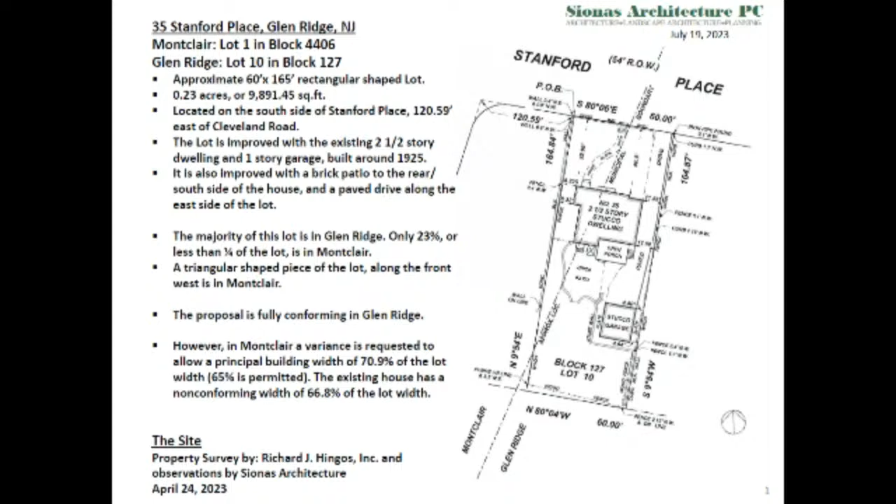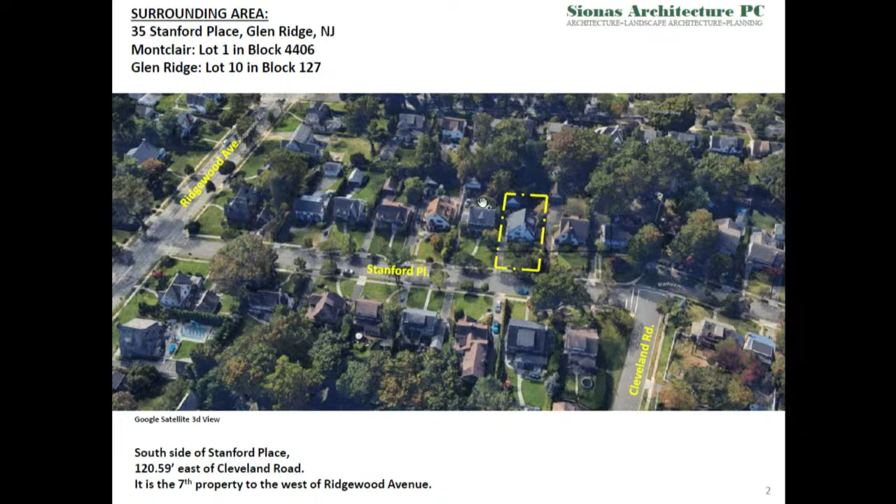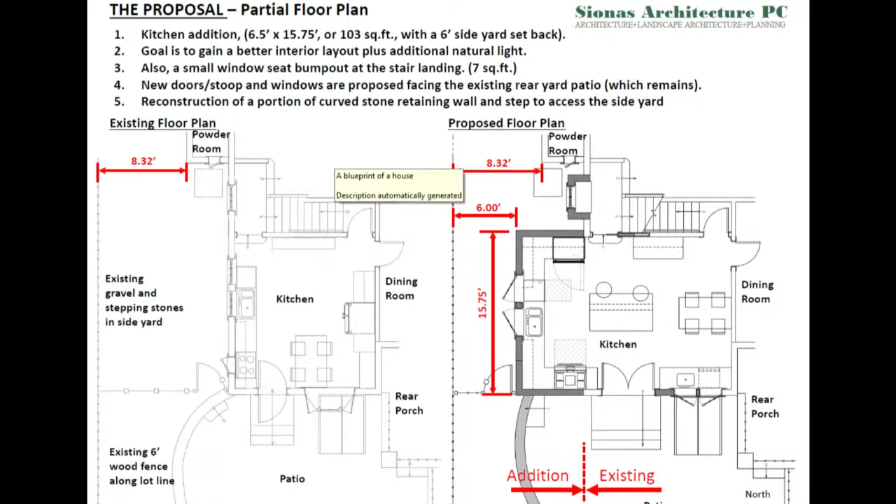There's a curved stone retaining wall that leads from the patio to the existing side yard. That will remain, but be slightly reconstructed to move the gate that leads from the patio to that side yard. That side yard, in the bottom left of the previous image, is currently gravel with stepping stones, so it's a little-used side yard. There's also the existing air conditioning condenser unit there.

The entire yard is surrounded by a 6-foot-high wood stockade fence on this west side, which adjoins the neighbor to the west, and then there's a wood fence separating the patio from this side yard. Next slide is the site plan.

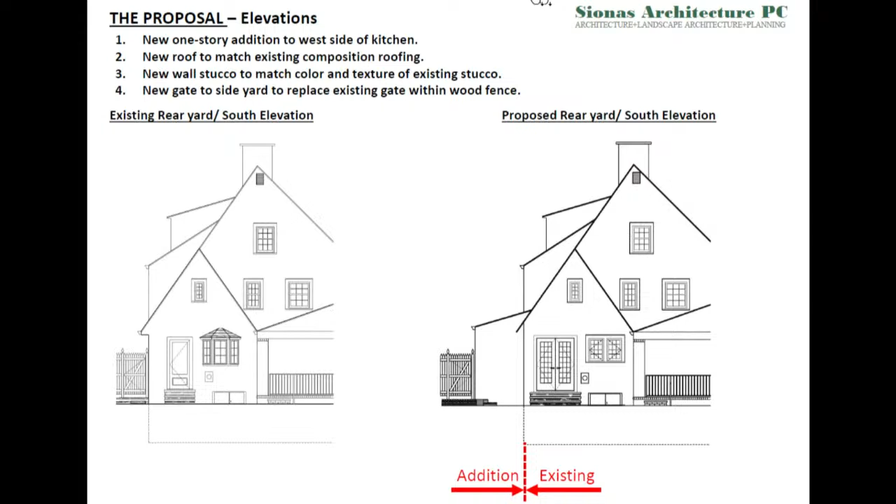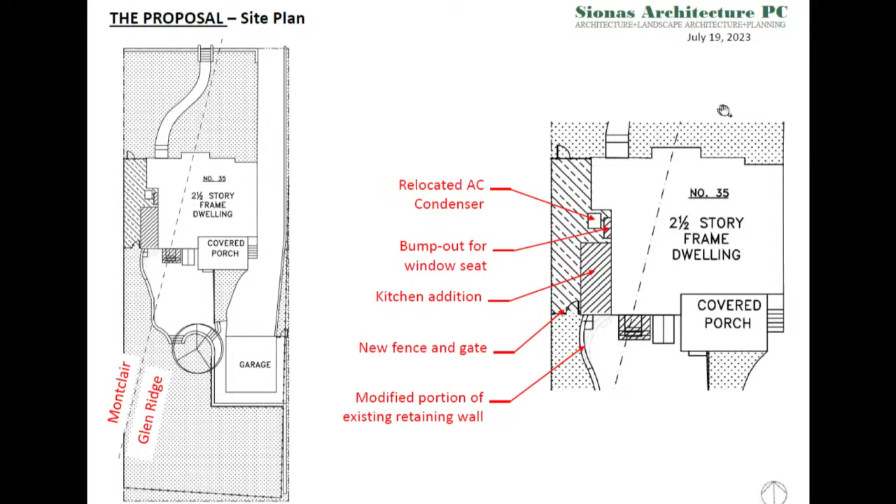Importantly, based on the recent ordinance amendments, it complies with the maximum impervious coverage. The impervious coverage on this lot is allowed to be 55%. The existing is 41.8%, and the proposed is only 43%, so we're well under the allowable impervious coverage.

As I said, the existing house was developed around 1925, as was the garage. It has an existing nonconformity, so the front portion of the house closest to the street encroaches into, or exceeds, that allowable 65% building width.

But once this ordinance was adopted, I think in 2006, to allow for a maximum of 65% of the lot width, and the purpose was to minimize large houses on small lots, this house was built in 1925, and it didn't comply then, and it doesn't comply now with that 65% maximum lot width. But due to the existing topography, as I said, the property slopes up from the street at Stanford Place.

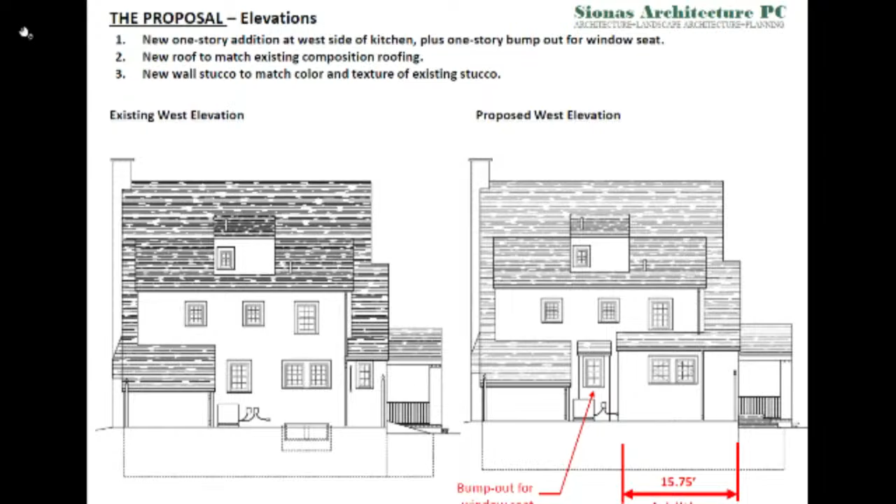And then the condenser is just being essentially slid over a few inches, bumped out, slid to the west in order to create that bump out, as you look at the floor plan, with a window seat at the bottom of the stairway.

The current layout of the kitchen with the 4 windows presents the same view of the house to the west, I think is how you described it. Or is that to the north? This image is from the house to the left, to the west.

So with the bump out, you'll be moving, what was it, 2 or 3 feet further towards that house, is that correct? With that small bump out, the one that's labeled bump out for window seat. Right.

And do you anticipate that there would be any concerns by the neighbor, have there been any concerns about the windows, sort of the view going back and forth between the 2 houses, because you're moving a little closer with the bump out? No. As I stated, there's a 6-foot-high solid wood stockade fence along the common property line. Also, I failed to mention that the neighbor to the west has their driveway directly along the common property line, so we're separated from the neighbor to the west by their driveway.

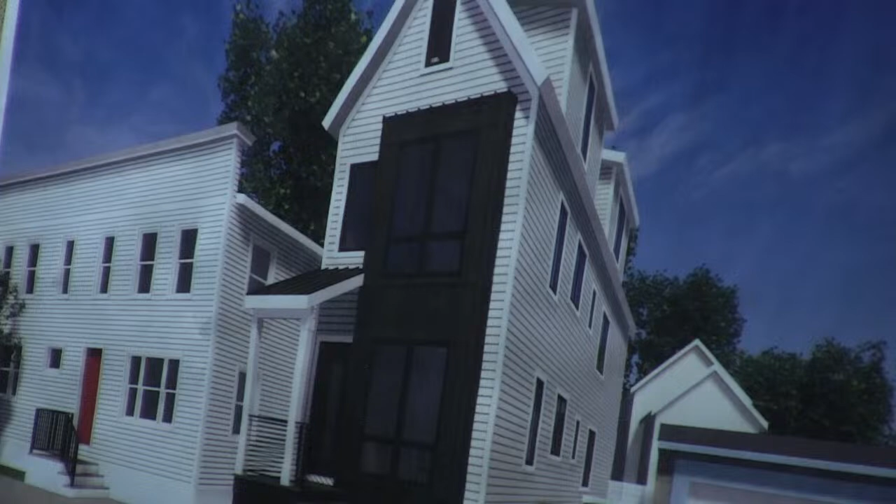So here are the same drawings that you have in front of you as well. Let me position these a little bit better so the board can see it. These are the same drawings that were presented and submitted to everyone at the board. The only difference is that I included the impervious calculations that were included as an exhibit that Tommy had put online as well, so that information that I sent by email that got approved, I just added that little blurb onto these drawings. So here you can see that what we're presenting is similar in flavor to what I've submitted before to the board that has gotten approved.

Just up the street, actually 21 and 23 New Street. Tommy, I'd like to thank you too in your report. Actually, if you look at the last page of Tommy's report, you could see the newest image of 23 and 21 New Street that has gotten built. So thankfully, what we had come up with before and what was drawn was built, it did match the drawings, and it did create kind of a beautiful streetscape, which is what we've been trying to do in and around the area.

So similar in flavor to 21 and 23, we want to present 13 New Street. Again, this is a 2-family house that we're proposing. The layout is going to be that the first floor and basement are one unit, and the second floor and the subsequent attic space will be another unit. This is the same way we had set up both 21 and 23 New Street. So similar to those two, but we have a similar condition here where we have a very narrow lot. It's actually undersized both width-wise, length-wise, square footage-wise. It's a very tight lot, similar to the other two lots, but even tighter.

But yet we're still trying to make concessions in a way to fit a proper two-family house that fits the neighborhood, that improves the streetscape, and also tries to hit the new impervious coverage marks that, during the course of designing this project, had not been enacted, but have since been enacted as law. So although we are asking for that variance, we did actually reduce the impervious coverage percentages with this proposal. So I want to go to page 2.

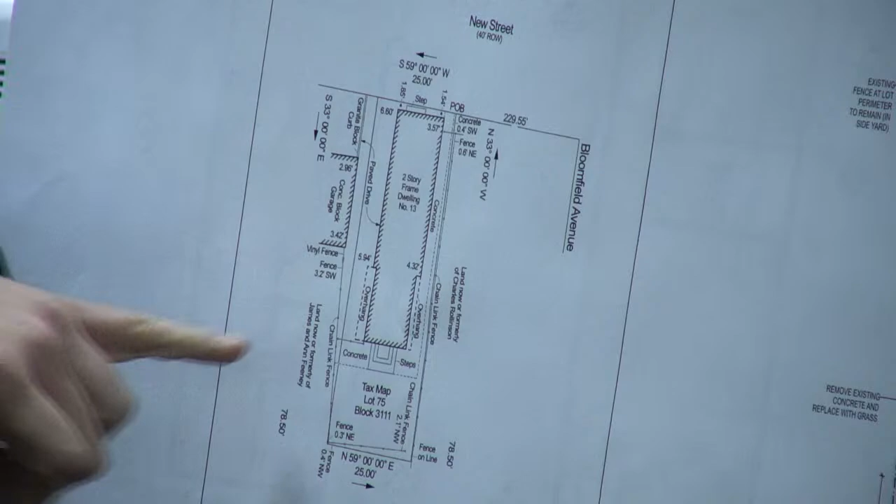So here on the second page, on the left-hand side, you have the existing survey, although it's turned the wrong way - the new street is facing planned north. You can see there's only about 1.5 feet where the existing structure currently sits, and on top of that, they have much more concrete and impervious coverage at the rear of the property and the side narrow sidewalk.

So with our proposal, we are looking to greatly reduce the pavement on that side area, and on top of that, we are removing all of the rear and even more of the parking side impervious coverage. Unfortunately, even with these reductions, we didn't quite hit the 55%, but we got close at 57.6.

So although we are asking for that variance, we actually reduced the percentage of impervious coverage with this proposal compared to existing. On top of that, what we are proposing is that the back foundation walls be straightened up and filled in at the back in order to give us enough depth for the proposed new construction, but without asking for any additional variances with regards to rear setbacks.

On top of that, the biggest implication here is that we are improving the front setback issue. Currently, the front setback is only about 1.5 feet. What we are proposing is that the main articulation at the front, the black articulation you saw in the rendering earlier, is 5 feet from the front property edge, and the main white wall of the proposed design is actually at 6.5 feet. So we are providing an additional front setback to help step this building backwards in line throughout the street.

Unfortunately, our neighbor to our left at 11 New Street is pretty much almost as forward as you can go, and the existing house is at that level. We're trying to push that back to create a better streetscape.

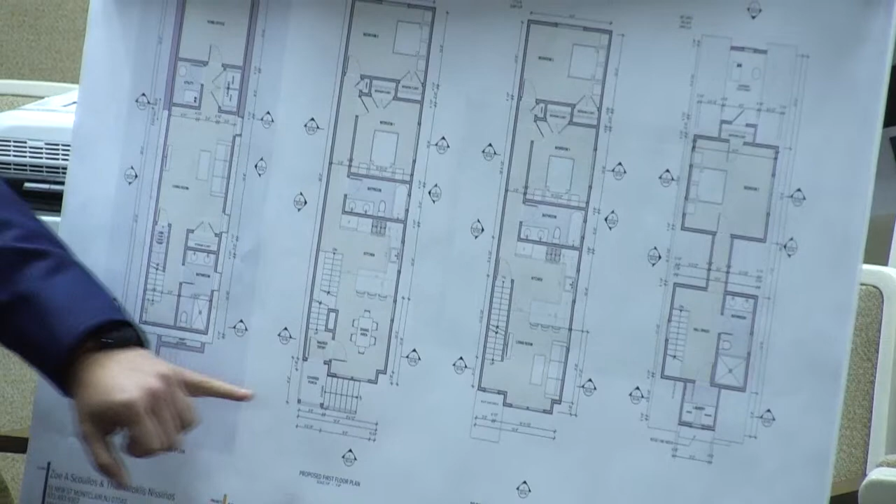Then on the first floor at the front, you have a staircase with a covered front porch that enters into a shared hallway and staircase leading up to the second unit, which is the 3-bedroom unit I mentioned earlier. Similar layout to the second floor - you've got the 2 bedrooms in the back with the living space and kitchen towards New Street.

And then on the attic floor, you have the additional whole master floor, calling it the 3rd bedroom, that has its own separate bathroom and its own separate walk-in closet, so that can be more of that private story. Again, it is upholding the regulation with regards to the size of the dormers - they do not exceed 50%, similar to what we had also proposed at 23 New Street. So again, we're not asking for any variances there either.

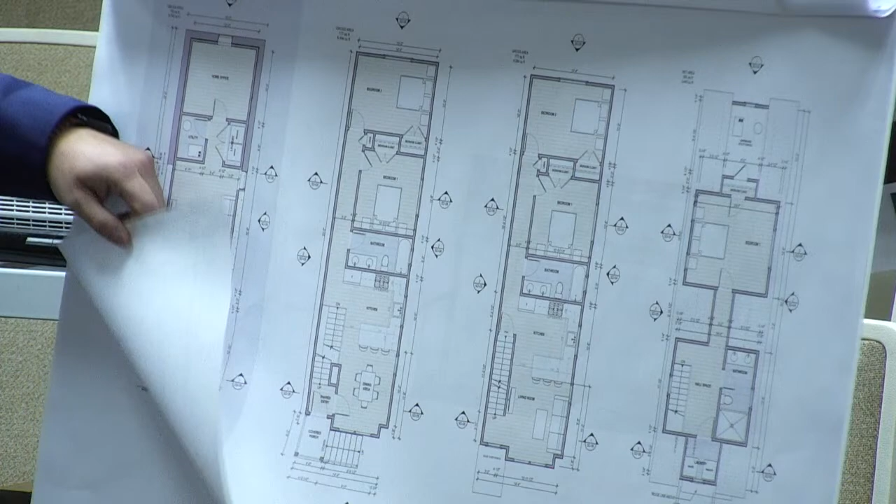And on the next page, the rear elevation and the side elevation facing the narrow side yard. No windows on that side yard, mainly because of the distance from the existing property line. We don't want to propose any windows there because that wall is going to have to be fire rated. The only windows we're proposing are up in the attic space.

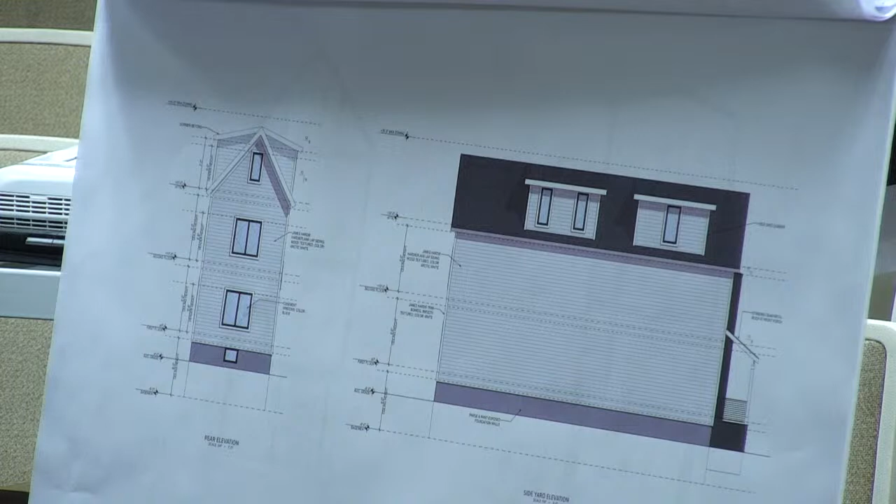So that way we try to utilize all the percentage we're allowed by code in that attic space to bring more natural light up there, as opposed to not so much natural light at the first and second floors. And then lastly, we provided some diagrammatic sections, as in our previous applications, to show we're trying to give generous height with 9-foot ceilings throughout, yet still staying under the 35-foot maximum height value per zoning.

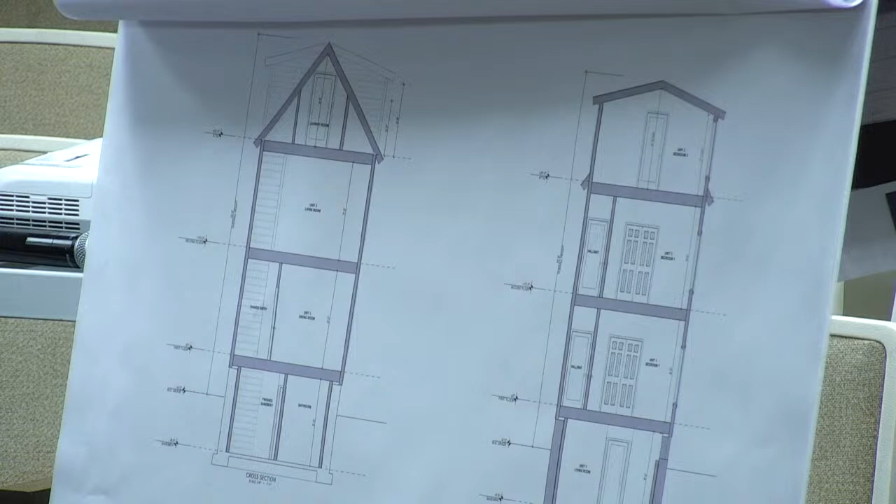Okay. Just a couple of notes here, looking through Mr. Scabiglia's report, just point out where the HVAC units are. Yes.

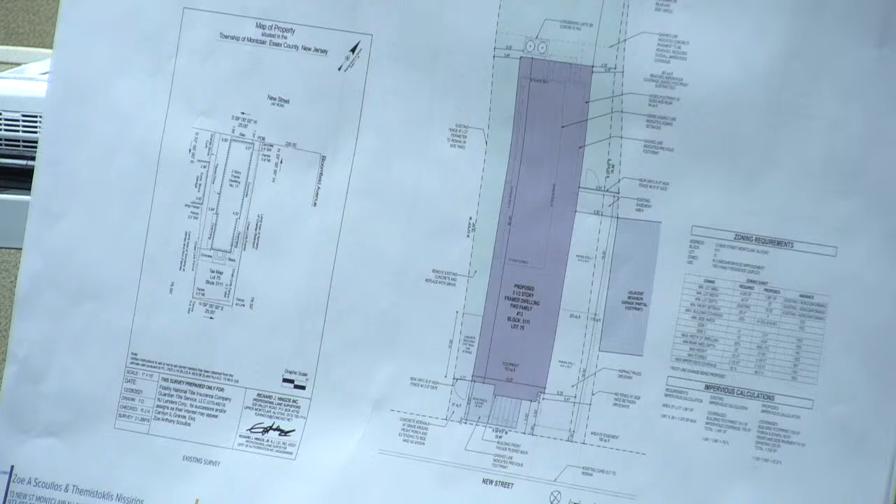Going to the second page, you'll see on the right-hand side the architectural site plan. The 2 HVAC units will be placed at the rear of the property, on a concrete pad that is 6 feet from the property line. We need to maintain that minimum 6 foot per the zoning ordinance. And should the board see fit to approve the application, the applicant is willing to put new sidewalks in front of the home, landscaping, and new fencing. Correct. Thank you, I have no further questions.

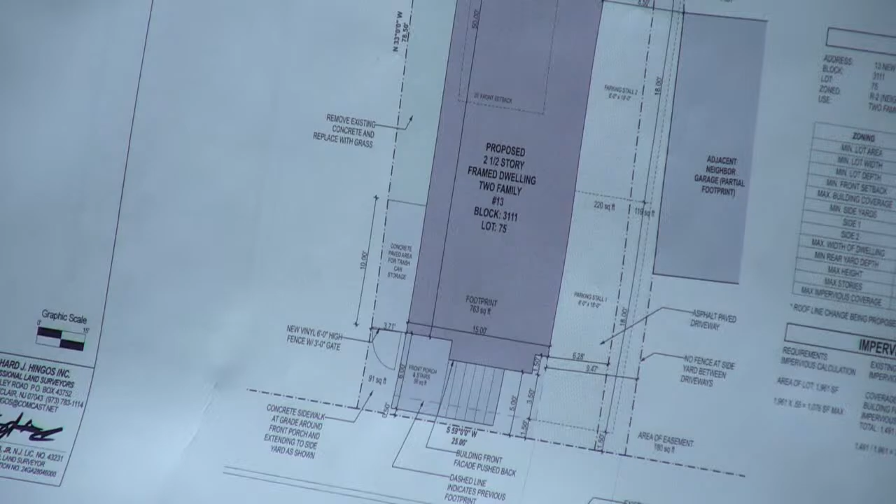Okay, and those 2 parking spaces will be reserved for the tenant utilizing the upper level, which is the second floor and attic space, yes. So the tenant using the lower level would be on the street? Would have to, yes. Essentially, would have to have street parking, would have to apply for any permits that they need to. Okay, all right.

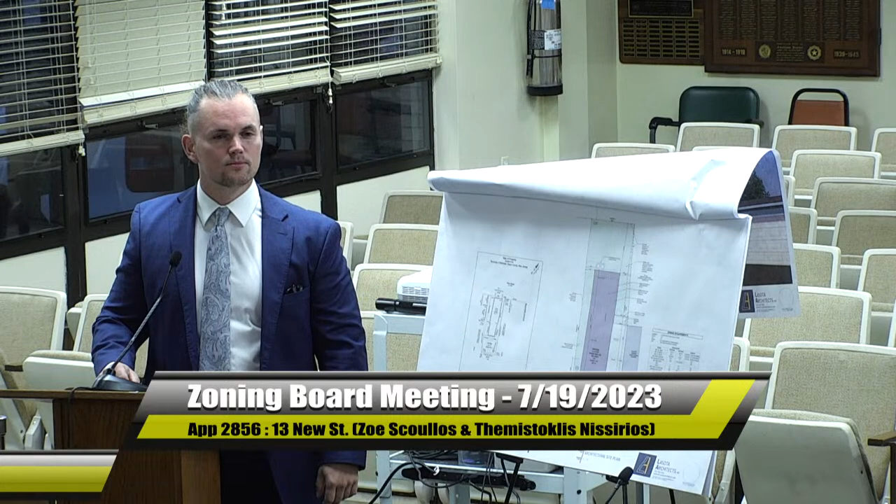So the reason why we are where we are is because of the poor quality of both the assessment of that structure and the poor quality of the construction work that was already commenced. Correct.

They tried to put finishes on a structure that was compromised. Unfortunately, the homeowners, frankly, got dealt a bad hand when they hired a contractor who wasn't the most truthful. I think that's the nicest way I can put it.

Once another siding company had come in and removed the existing siding and showed the existing exterior sheathing, that's when the question marks started happening. And then just walking through the inside, even though there's nice painted sheetrock everywhere, nothing's straight, everything's crooked, everything's wonky, everything's wobbly.

Architecturally speaking, it's structurally sound for now and it's standing on its own feet, but it's not the best solution. It really should be addressed, and thus tearing it down to the foundations and rebuilding it is the best option.

One of the things I noted right away when I looked at the property was that the wall between 13 and 11 had an obvious buckle to it, which I would assume is essentially irreparable.

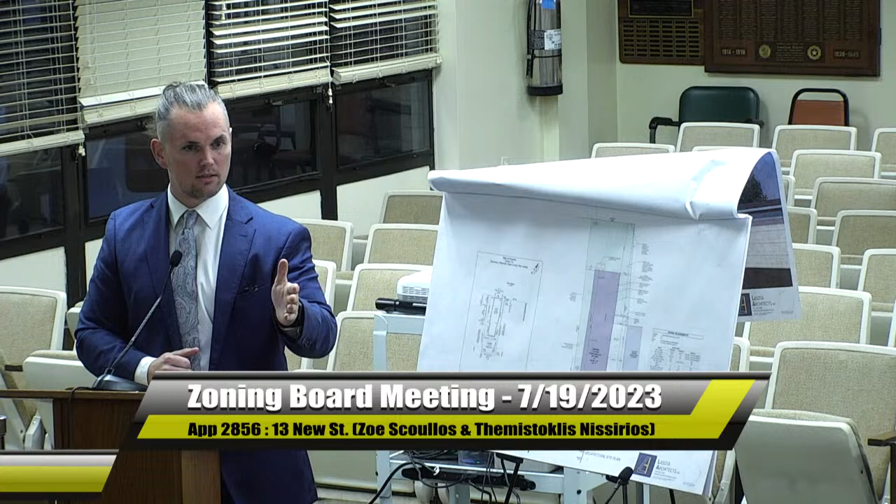And from the inside, we also have a layer of fire rated gypsum board. So you're having fire protection from both sides per building code, which we have to put in the final construction drawings in order for it to be approved by the building department. So all of these homes have that.

Okay, and then just circling back one more time in terms of the durability of the construction, you said approximately 30 to 50 years is what you would foresee. Would that be typical of new construction not only in Montclair but other communities? Yeah, that is typical new construction -- that's kind of industry standard.

All right, thank you very much.

Can you talk about the foundation and how much of the existing foundation you're going to reuse?

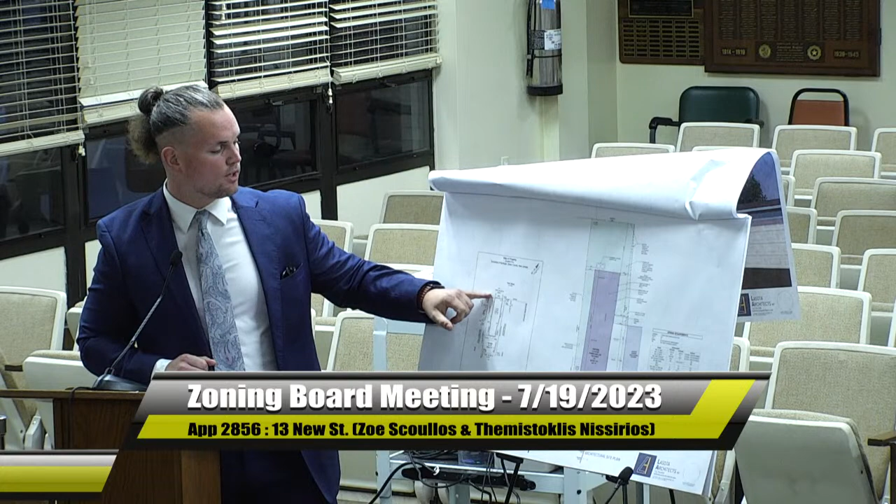Great question. The front foundation currently, where it's only that 1.5 feet, is part of the existing home. You can see in Tommy's report a great photo from the front showing that the front portion has a typical gable roof that sits proud and high of the rest of the main roof. That portion of the home was built on an existing old front porch that was covered up and then built upon again with a second floor.

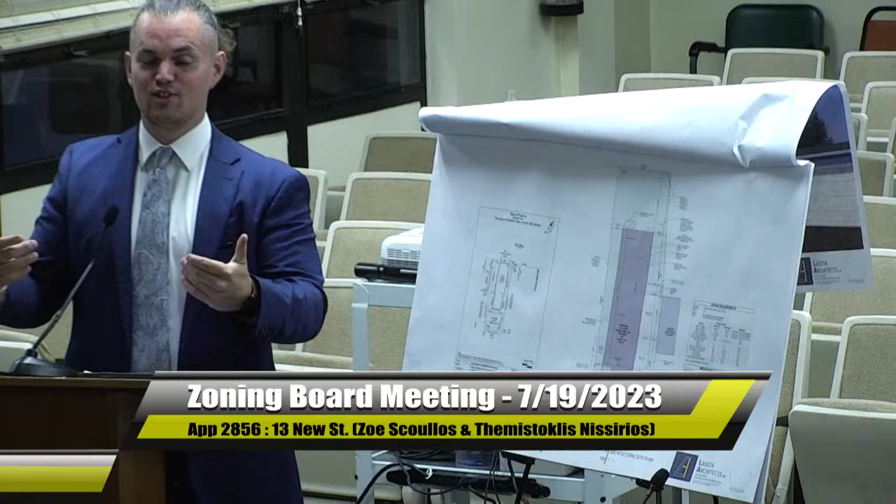So that entire foundation we are removing, because that foundation is actually not in great shape. In addition, in the existing survey, you can see where the foundation walls push inward. That foundation is also not in great shape either. Architecturally, having that bump in the back, it would be much better to straighten out the walls.

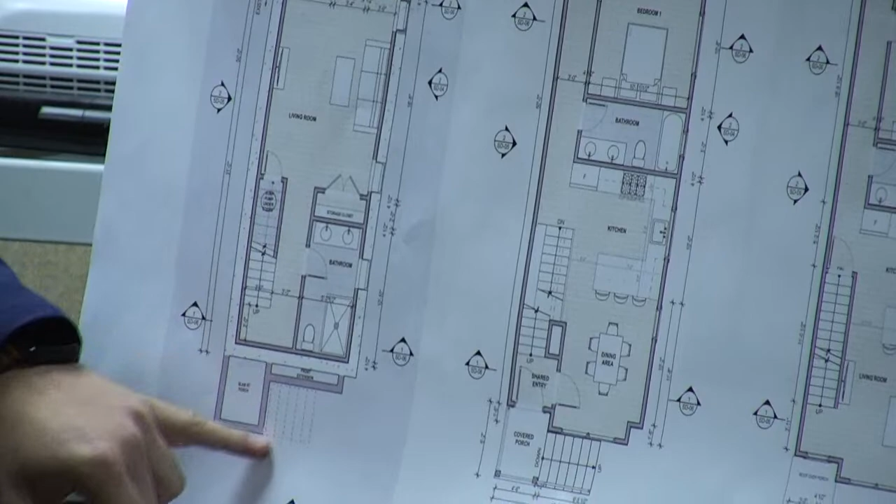So to answer your question, the portion of the foundation that we are keeping as existing—I'll go to the floor plans to help illustrate. You can see the exterior foundation walls that are not poché-shaded in gray; those are the existing walls we are keeping. The front area, we are going to be rebuilding the new front porch, about as close to the street as the existing one was. But mainly the back foundations where they stepped inward, that's the portion we are rebuilding.

So the portion under the porch and that bump out, that's all new, because the existing is in bad shape. But it doesn't extend beyond the existing? No, it does not.

Actually, let me confirm that—let me see my drawings here. No, the foundation of the front porch does come closer to the street than the existing, but it's only the porch and the staircase, not the actual structure itself.

Got it. The existing two-story wall is 1.5 feet away. The new stairs are a half foot away. So how much further is the new porch than the existing building? It sits 1 foot closer to the sidewalk, but it's only the open porch, not the actual structure itself.

And I think your counsel mentioned something about new landscaping—where would that go on the site plan? On the site plan, there is no landscaping up front, which currently there isn't any there. It would really be landscaping at the sides and the back that we are proposing.

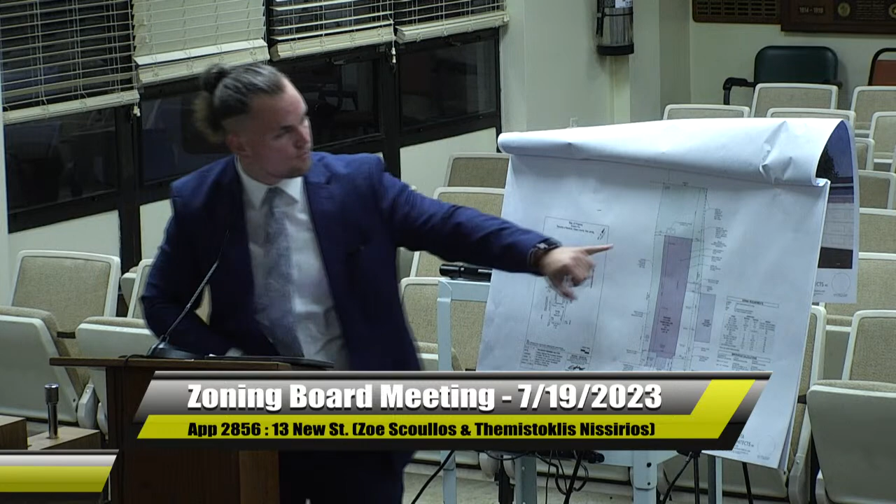On the architectural site plan, we are removing a majority of the concrete on the sidewalk and walkway, and we are removing the staircase and landscaping at the back, up to where the parking starts. That area would be landscaped—well, it would be sodded.

What's the material of the existing fence? The existing fence is a wood stockade fence. And that's to remain? Yes, that's to remain. There is a new fence we are proposing between the parking and the side yard leading to the backyard—that's the one little fence we are proposing new.

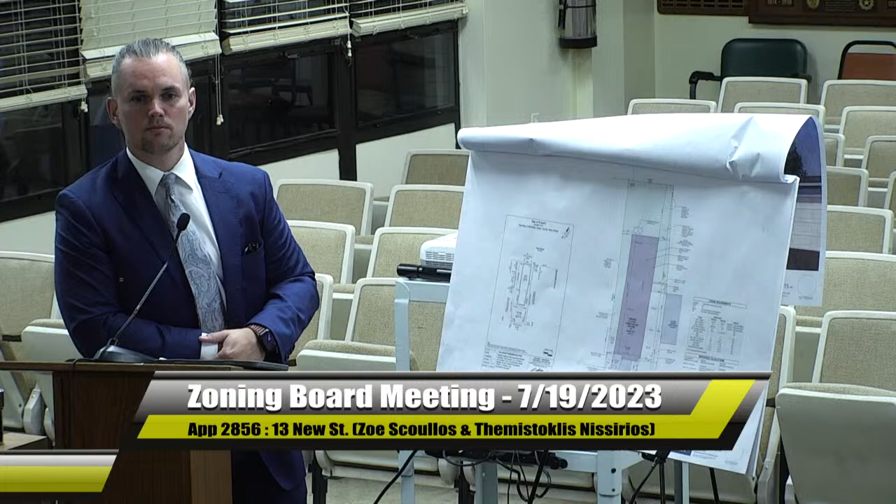And the driveway pavement, is that new? Yes, it's existing asphalt that needs to be repaved. Would you consider a pervious material for the driveway?

No, we weren't proposing anything pervious. We wanted to keep it impervious because we wanted to reuse some of the existing driveway if we can, or just strip it down to a level and do a top surface recoating and repaving. We're not going to rip up the existing driveway all the way down to bare earth.

Thank you. Perhaps if the commissioner suggests, maybe a rear portion of the driveway could be those permeable pavers—maybe not the front, maybe the back. Yeah, we can certainly take a look at that. We've designed and used pervious pavers successfully before.

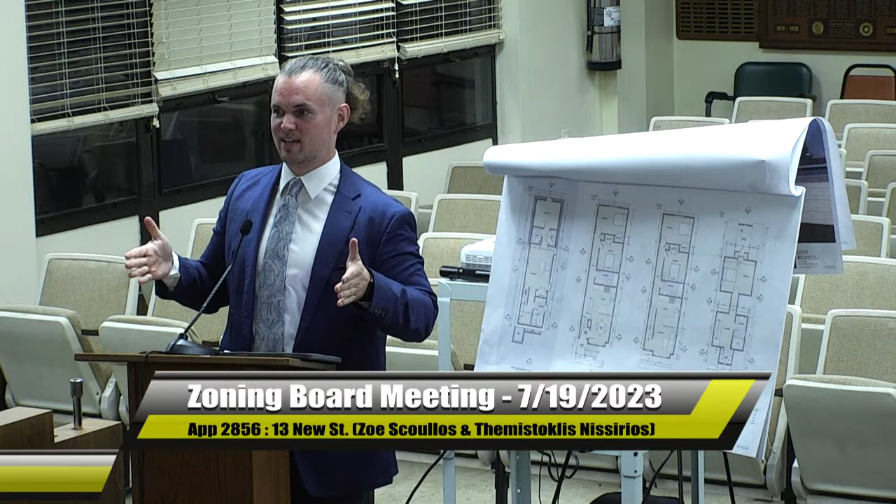By providing all new framing, we're going to be framing left to right, which will help create a diaphragm that stiffens the whole house and creates better lateral stability than what's currently there, especially since it steps backward and has overhangs at the second floor. You don't need a degree in architecture to see there isn't a lot of inherent stability in the current shape. By providing a nice clean box, there's something great about simplicity—a box has a lot of inherent rigidity geometrically.

Just speak a little bit about the question regarding stormwater management and the sump pumps that will be installed in the basement, which currently neither of are there.

Neither are there, but we will provide a French drain. We will provide sump pumps for this. We know that there is a water issue. We are experienced, especially in Montclair, with a lot of the water and rainfall that happens here in town.

So this house will have a proper French drain and sump pumps. And I'm also thinking because of the proximity of the other properties, this is really necessary. Correct. On top of that, even though we are asking for the impervious coverage variance, we are actually reducing it. Currently there's 70-something percent impervious coverage. Even though we're putting an addition on the home, we are reducing the total impervious coverage.

Hopefully with that reduction, it will provide at least a little bit of relief to the immediate site and its surroundings. Because I'm wondering, your recent calculations show 57.6%. Correct. And you need to get to 55, so maybe with pervious pavers you might get it. Potentially, yes. We'd have to run the numbers, but yeah.

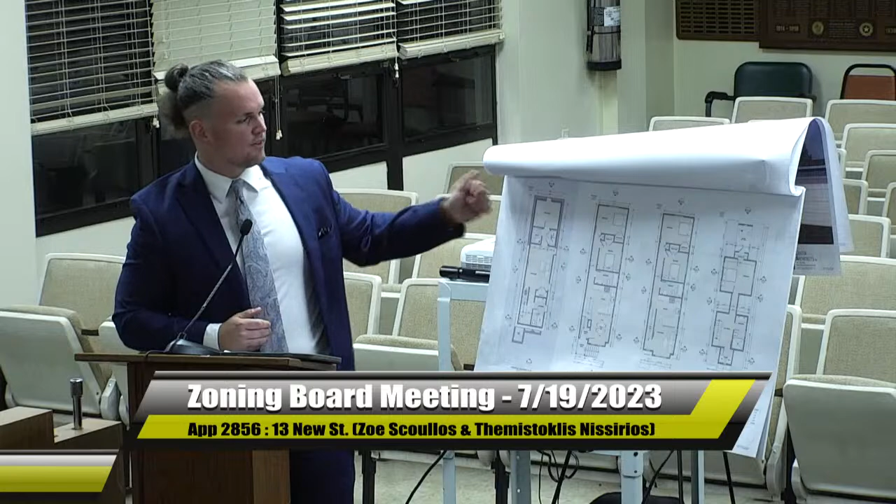Okay, and lastly, the other question was around the fence, because you're requesting a variance from 4.5 to a 6-foot fence. And that's just because of what? Because even though we are asking for that 6-foot fence right against the parking, it's because it's right next to the parking. The fence that does face forward is set back about 2/3 of the structure. We are asking for that 6-foot fence because cars will park pretty much right up to it, and we wanted to provide that visual barrier and a stoppage for the cars and for the tenants there as well.

Also, with regards to the upper units, they'll probably get the parking space, but then the backyard will probably be able to be used by the first floor and basement. So it also helps as a separation between the two.

And to clarify, there's another 6-foot fence proposed on the north side of the house where the trash receptacles will be kept. Yes, this one here. Just to help answer that point, with all the trash receptacles there, a slightly taller fence just to kind of keep that contained. We all have trash, we all have to deal with it in one way or another, but if we don't have to see it from the street, I think that's at least a little bit of an improvement.

Okay, alright, thank you. Okay, I'll continue with the fence. Mm-hmm.

The fence that's existing on the south and east sides, is that the neighbor's fence? On the south and east sides, that is a good question. I don't know whose fence it is. The fence is right on the property line between. Looking at the Hingos' survey, I'm not sure who that fence belongs to. It is showing the fence right on the line.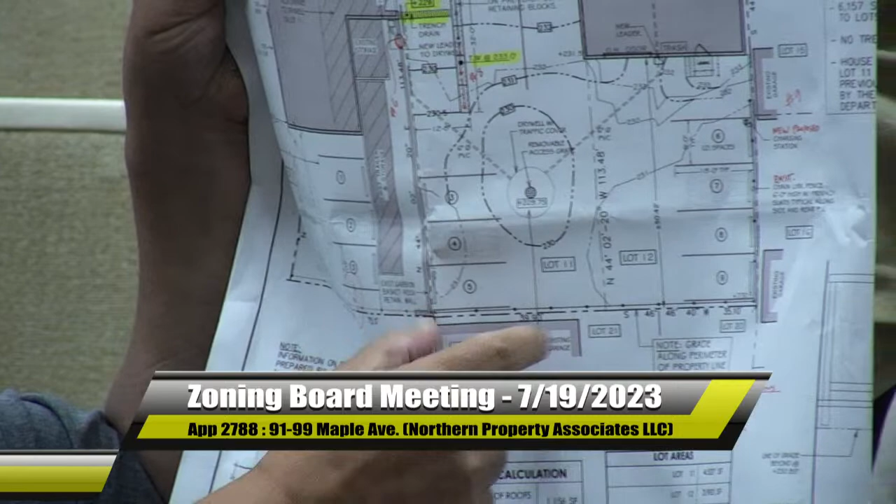If you look at the property, from 91, when you come around the back you have a rear garage right up against the property line here. Then maybe 20, 25 feet, then another garage here. Then another curb line, and then another garage here. From here to here, there are 4-foot, 5-foot round trees, bushes, shrubbery. You can hardly see any other property that's there. Now, I'd be willing to talk to those homeowners if they would allow me to get up to the property line to give us more space, because when you come down that driveway with a 40-foot delivery truck, the whole point I'm trying to achieve is to be able to pull straight down on an angle and back right up against the building where the loading dock's going to be. If I come in 4 feet or 2 feet, we're going to have a really hard time trying to navigate that truck to back up against the building. So if we're worried about people looking through there or being too close to the line, I would be willing to talk to the neighbors and put whatever coverage, bushes, whatever they need in that whole area to make it look better for them.

But you're concerned about giving up the room in the parking area? Oh, definitely, because it makes it tighter. Okay.

Comment number 5 talks about privacy slats in the existing chain link fence at the rear of 99 Maple. I will be replacing the screening we've had there for years with vinyl slats in the fence. Would that be for the complete rear as well as along the sideline? That would be the entire rear and the sideline for 99. Okay.